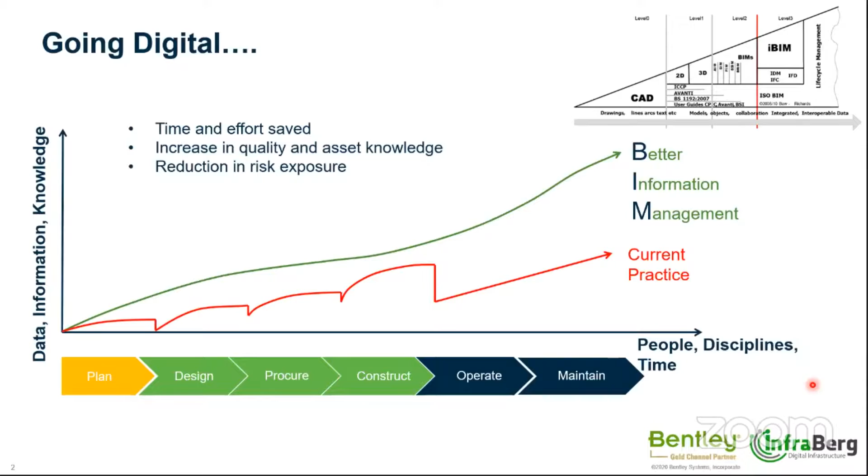This is how we try to design OpenRoads to meet these digital workflows. So if we look at this simple picture, usually in the past it started from CAD. Then we talked about BIM, and as we said, Bentley and Bentley solutions are going a little bit further. We call it digital twin, and a lot of companies use this term for developing their software in that direction.

So what is a digital twin? Simply, a digital twin is a digital representation of your project. And it is really challenging to create workflows, standards, etc., for closing the loop at each stage of the project, like planning, design, construction, and operation, and keep your digital representation of the project up to date. It means that at every stage, when you look at your model and project, it should look the same as the real assets. It's really challenging, but every aspect of OpenRoads, OpenRail, and OpenSite development is done having this idea in mind, as I hope you will see during my presentation.

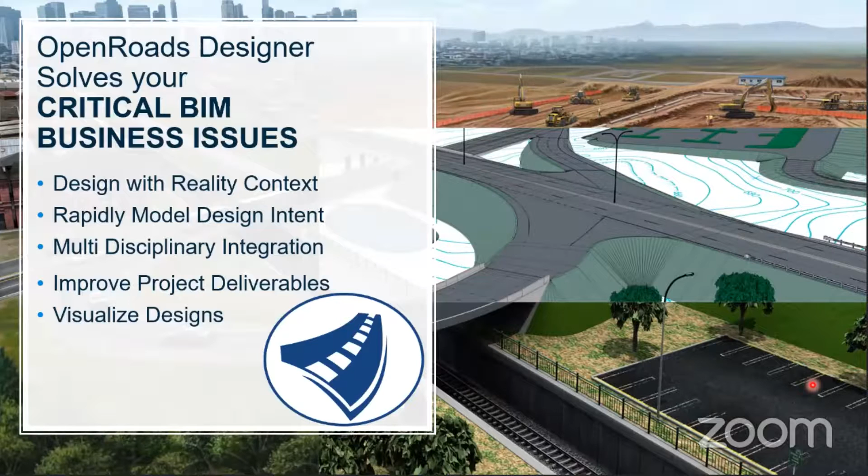And of course, there is a business aspect, meaning that what we do is to solve your business issue. So let's start with the first one. There is design with reality context, and what is important here, one aspect is that big data is impacting each design lifecycle process.

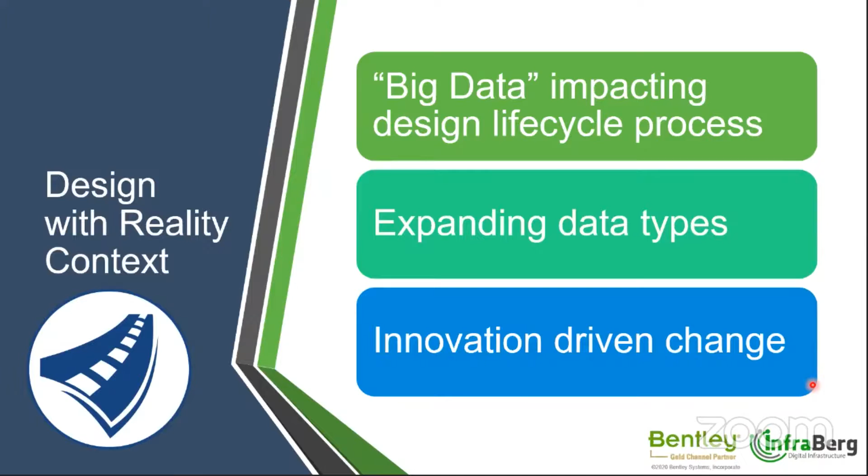Why? Because as you know, in order to do any infrastructure project, you need to take information about the terrain, and usually it demands a lot of data. And OpenRoads is very flexible for handling different types of data about terrain. And we are still expanding to different data types which are the standard on the market. And let's have a look at the example.

So as I told, the terrain is the basic information which the design process starts from, and OpenRoads Designer, OpenRail Designer, and OpenSite Designer are able to handle different types of data, like point clouds. Starting from point clouds, you can attach point cloud data to OpenRoads Designer without any additional application. It's a built-in functionality. You can attach a reality mesh, which Gerard talked about.

If this is created in ContextCapture, it's very easy. You just attach it as a reference file without any conversion. You can even attach it from the cloud if you keep it in the cloud, so there is no need to download it to your disk. As information about the terrain, you can attach any rasters. For example, orthophoto maps.

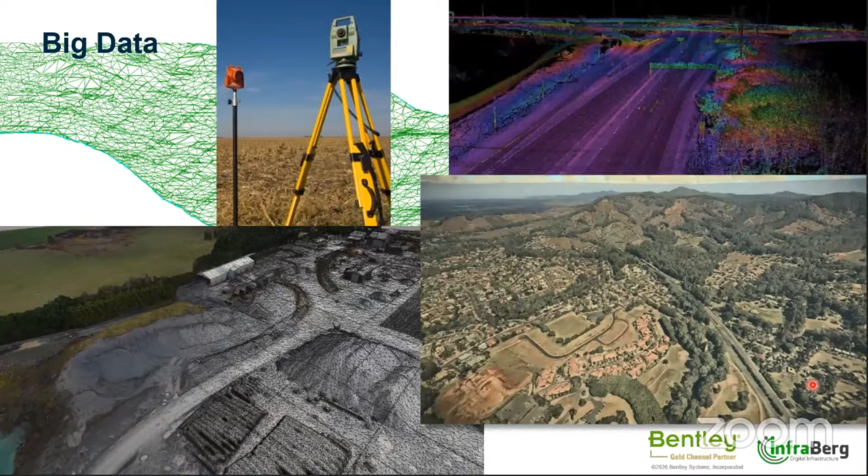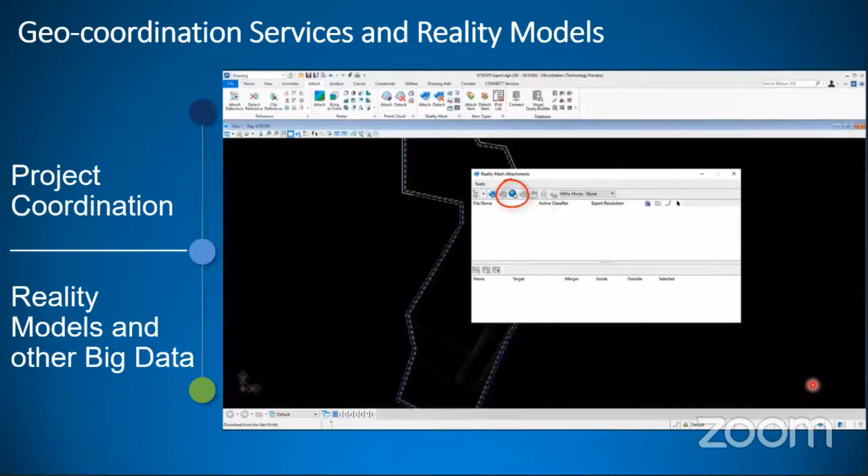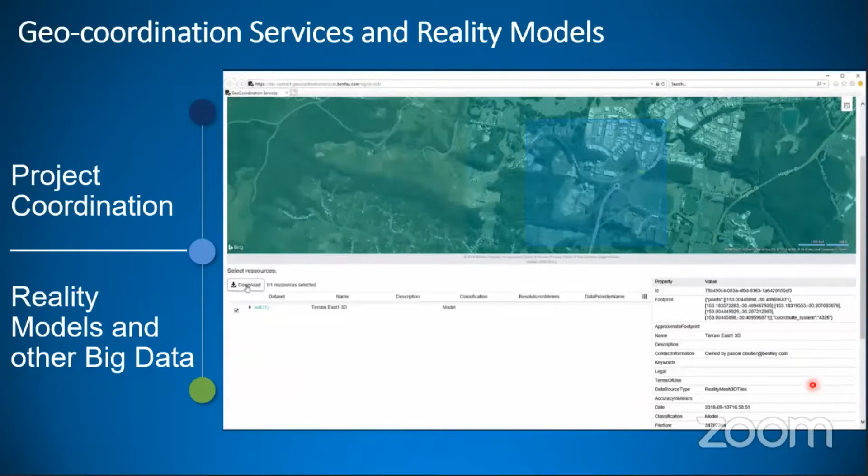And moreover, as you can see here, there is even functionality which allows you to attach data; of course, all the data are geo-coordinated. Here is an example from the geocoordination service where you can download reality models directly to OpenRoads from this service. Of course, it depends on data availability around the world. I'm sure there are no reality models in every part of the world, but when one is available, you can download it from this service directly to OpenRoads Designer.

Also, services like Bing Maps can be utilized in OpenRoads Designer simply as part of the view. You can just switch it on or off as a background, depending on your needs. So it's very convenient to have a broad context of your project in OpenRoads Designer.

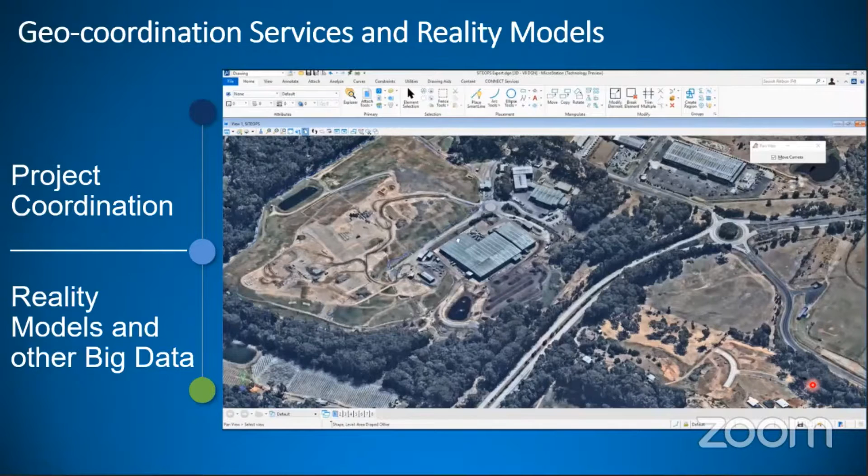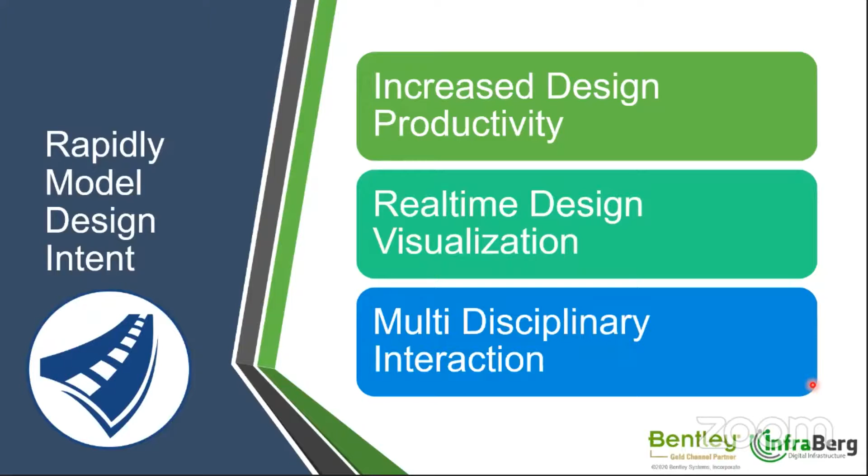So the next point is model design intent. So here let's have a look. In general, when we have the digital terrain model, the next topic is creating the geometry, right? In OpenRoads Designer and OpenRail Designer, geometry is parametric. It means that everything you create in OpenRoads is parametric.

What is the value of such an approach? The value is simple, because every project is iterated. Almost every project is changing every day. So when you have parametric geometry or other components, adopting this change is easy, because you just change the parameter and your geometry is adapted to the new conditions. So this is dynamic, interactive, and moreover rule-based.

What does it mean? It means when you, for example, create the centerline of one road and another road will be perpendicular to the first road, and it's your intent, the software remembers this intent, and when you edit this geometry, the software keeps this constraint. So when you move, for example, the perpendicular alignment along the first centerline, it stays perpendicular.

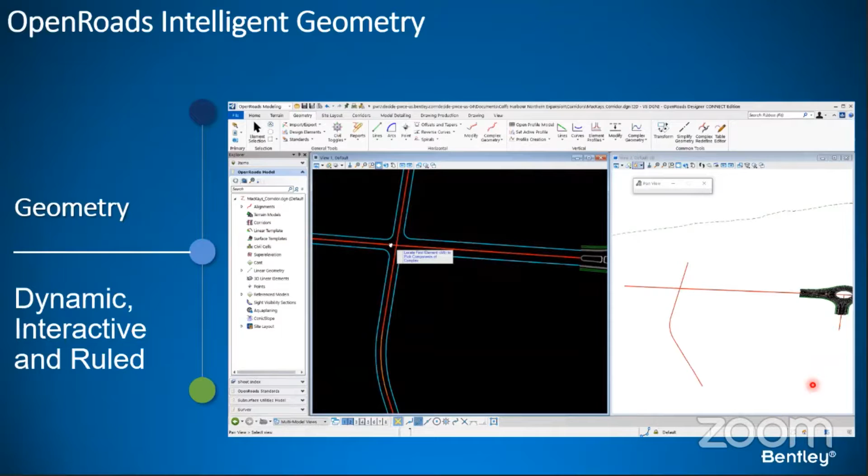And by the way, you can see here in this presentation that displaying your project results is on the fly. So if you create, for example, a 3D roundabout like here on the right screen, it's simply displayed, and there is no need for special generation or opening a special view, just opening the 3D view. And if you have assigned materials to your components, it is even displayed in a realistic way.

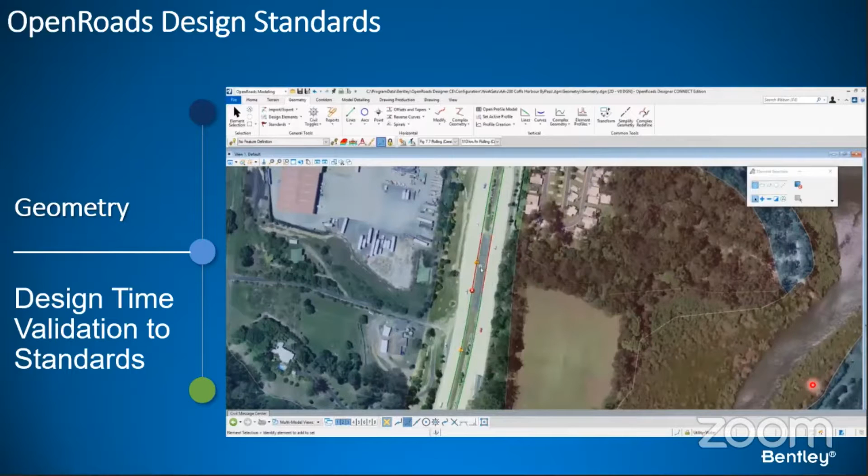So in the engineering world, the next topic: we know that standards are very important, right? And moreover, projects are complicated, and checking all standards for all geometries and all elements of your project manually is very hard to do. So the software has tools for automatically checking your chosen standards, and there is a message center which gives you information if something is wrong.

For example, if the arc of your alignment does not meet your minimum requirements, this is reported, and then you can act, changing it or leaving it on purpose, etc. So shortly, the design standards are under control, and the software is taking care of it.

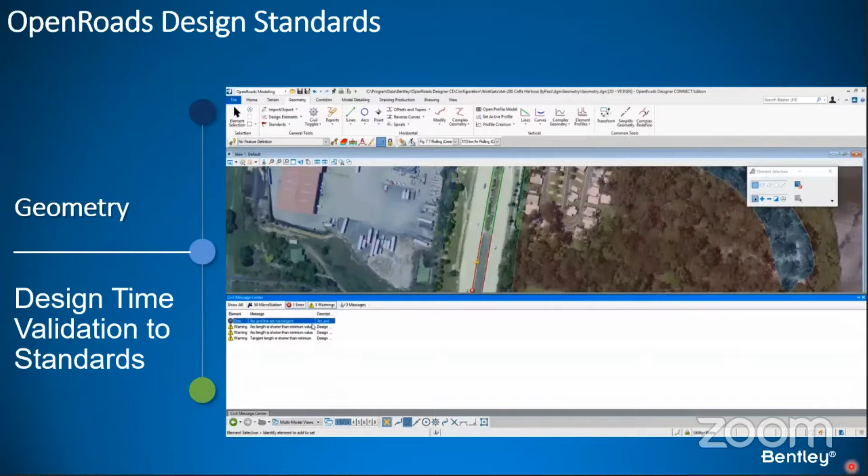And you see here there is a corridor, because when you have the digital 3D model, you have created the geometry, I mean the horizontal geometry and vertical geometry. Then the next step is creating the corridor. All is intelligent. What does intelligent mean? Intelligent means parametric.

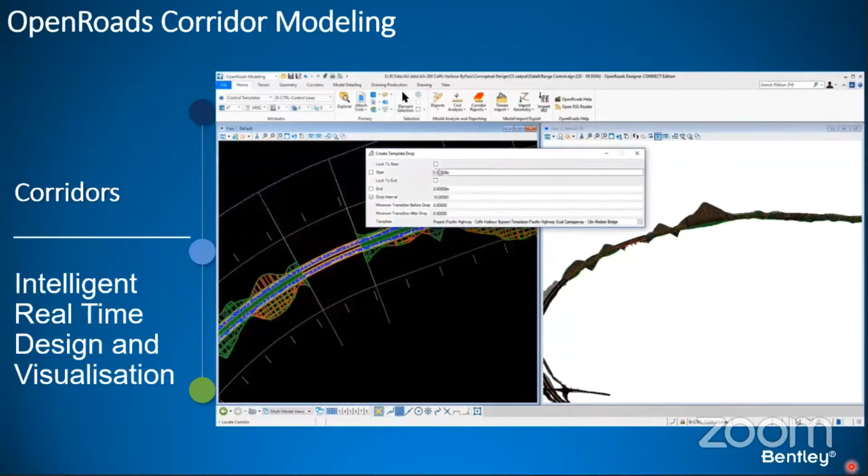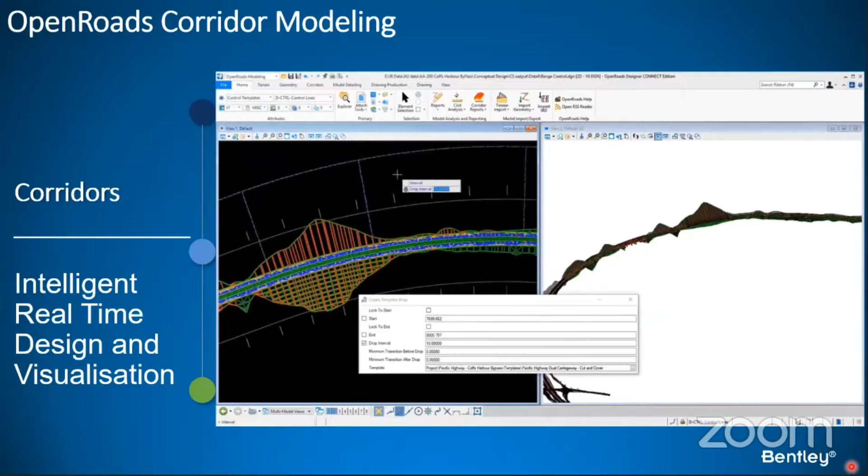It's in real-time design. So when you assign, like here, you see the template, automatically the software is creating your corridor in 3D. So almost in real time, you see the feedback of your project in 3D. And as I mentioned, when you have defined materials to your components, you see those materials in 3D view. For example, if asphalt is assigned to the pavement component in the template, you see in 3D view your pavement with asphalt.

And here you can see that everything is dynamic. So it means that when you want to edit, for example, the station of your bridge, you can just drag the beginning of, in this case, I believe it's the end of the bridge, and everything is recalculated in real time, and you are getting your model up to date.

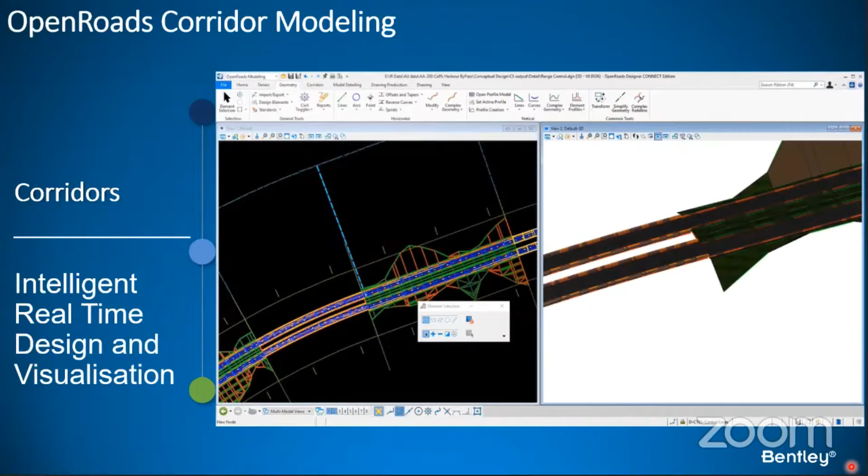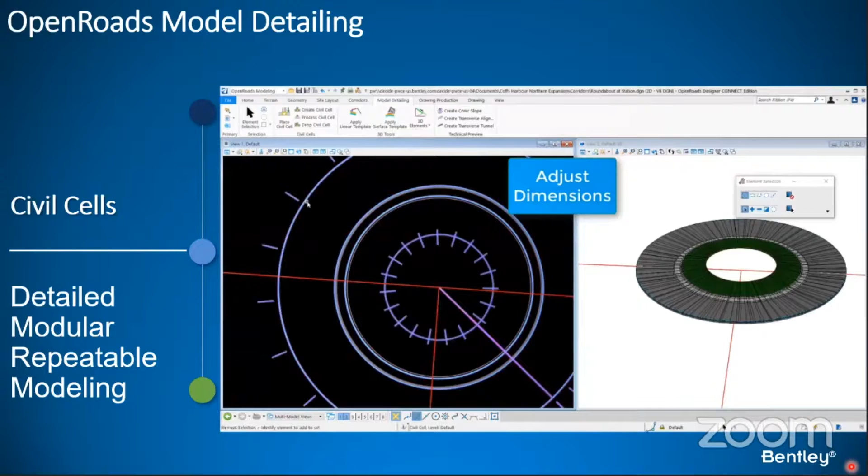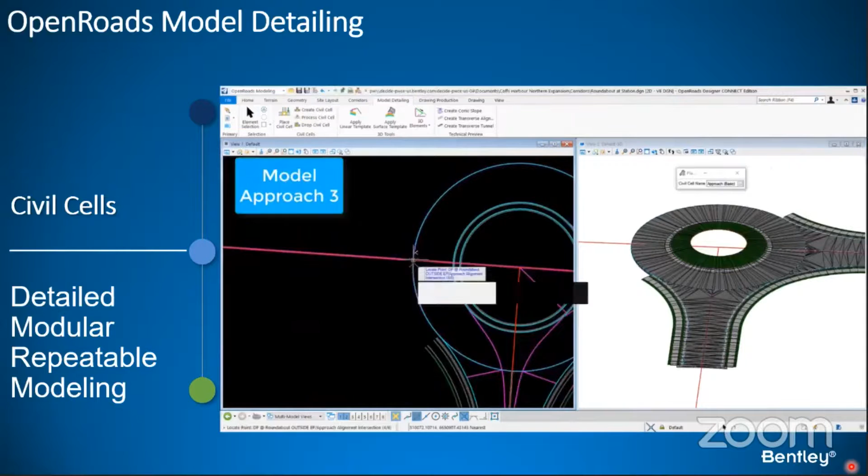So, the next thing is the so-called civil cells in OpenRoads Designer. There is a lot of engineering work with repeatable modeling of typical elements like, for example, intersections. In this case, this example is showing a roundabout. Each time you want to design, for example, a roundabout, there is a lot of work, because such elements have complicated geometry. So why do it each time? It's better to use so-called civil cells.

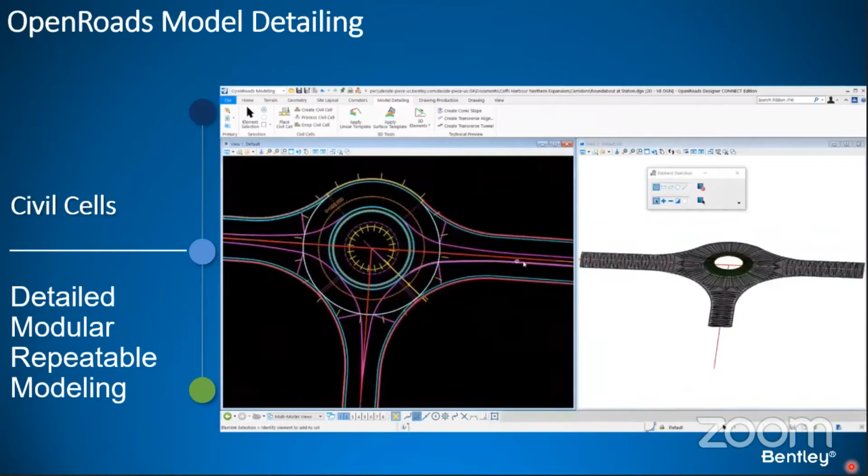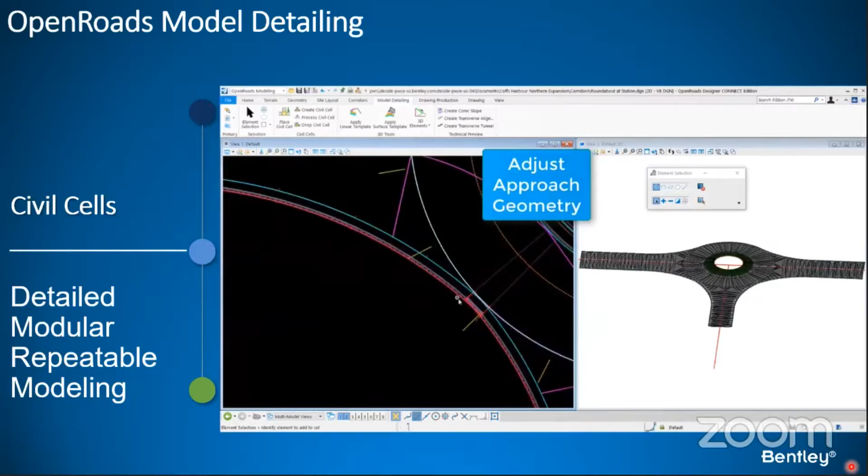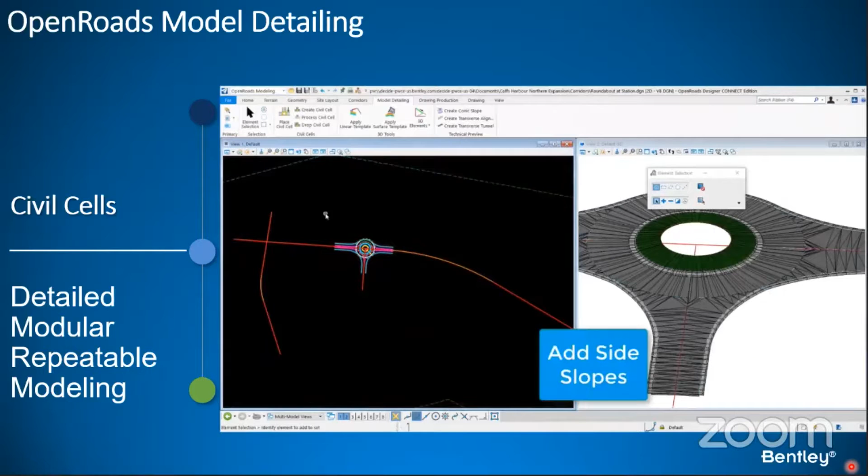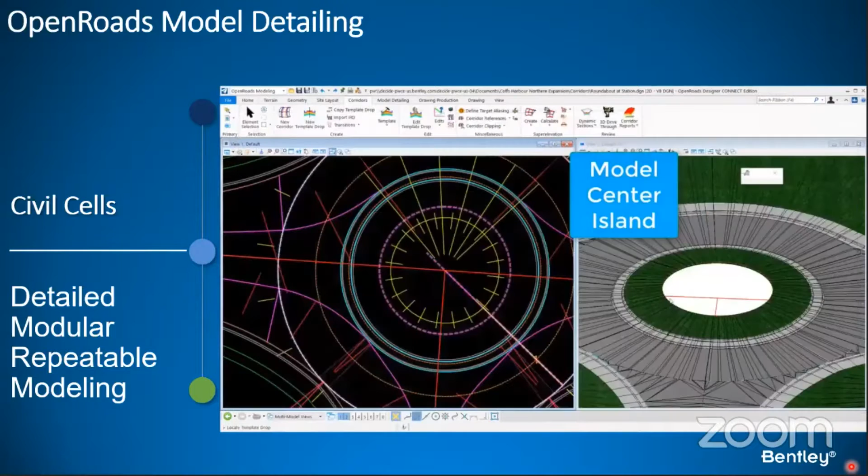It's just geometry saved to the library for reuse. So it means when you create, like in this example, the 3D roundabout cell, you can upload it to your civil cell library and reuse it for the next roundabout. It can be as simple as 2D geometry, but it can also be a 3D element.

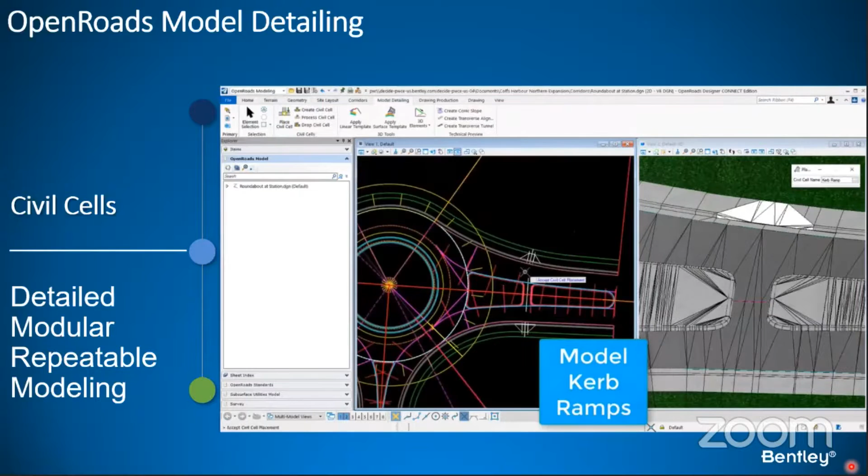Moreover, when you put this civil cell into your project as a second, third roundabout, etc., after inserting it you can edit it because it's still parametric. So if you want to adapt this civil cell a little bit to the new location, you can simply click, for example, on the geometry of the curve and change your radius from 10 meters to 15, etc. So this is a very powerful tool and saves your time for repeatable designing and modeling.

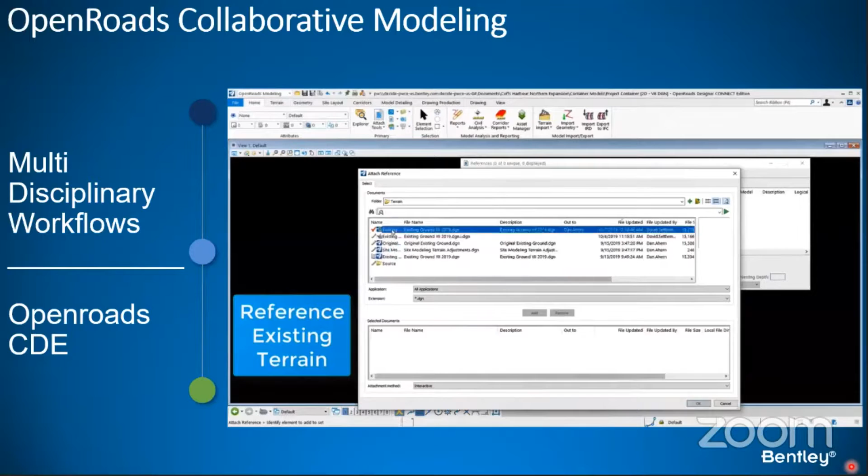Okay, and the next topic, which we believe is very important, is multidisciplinary integration. There is no infrastructure project consisting of only one discipline, right? Everybody, I believe, agrees with me. And one of the biggest challenges is to coordinate several disciplines together, especially when each discipline is using different software, there are no standards, etc. We believe that OpenRoads addresses this point quite well, I mean, multidisciplinary workflows.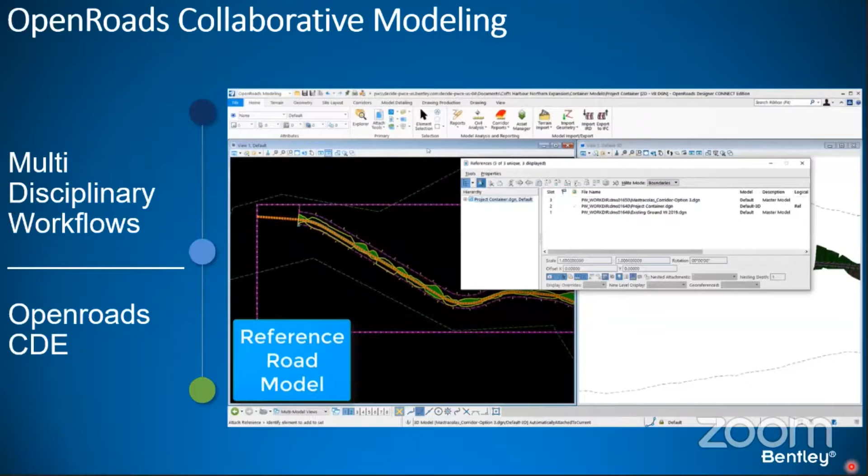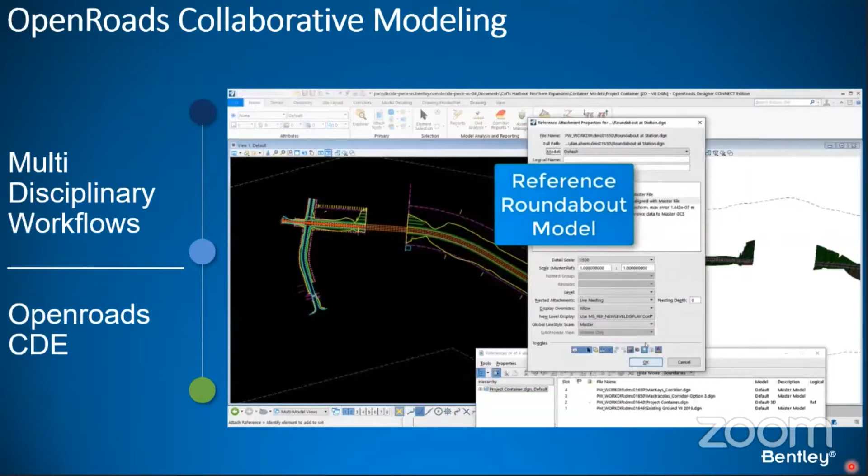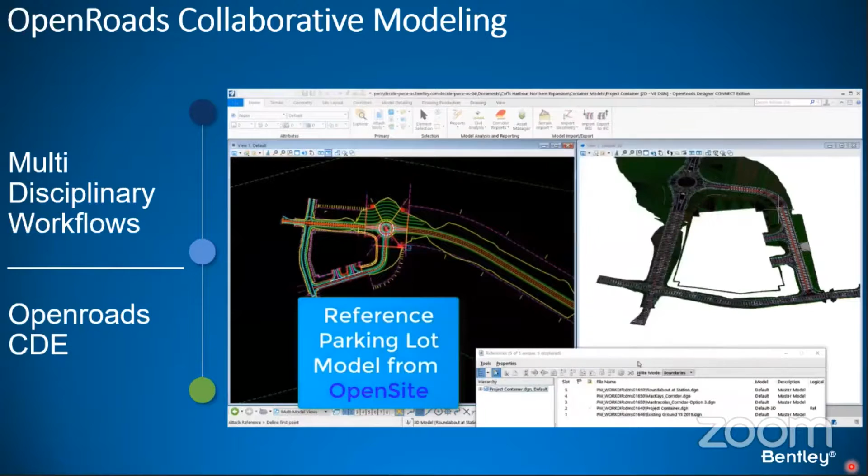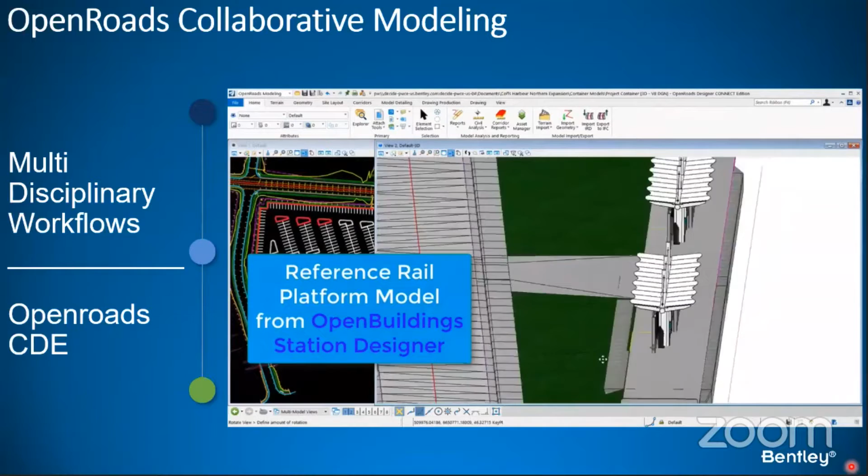As you can see here, there are models already finished, like the road corridor and roundabout model. They are attached to one file as reference files. Another model is a parking lot from OpenSite, designed in OpenSite Designer. There is an OpenBuildings Station Designer model. This is a Bentley application dedicated to designing stations, rail stations. And we will also attach from OpenRail the rail corridor, with the rails and full model. You can see it on the right.

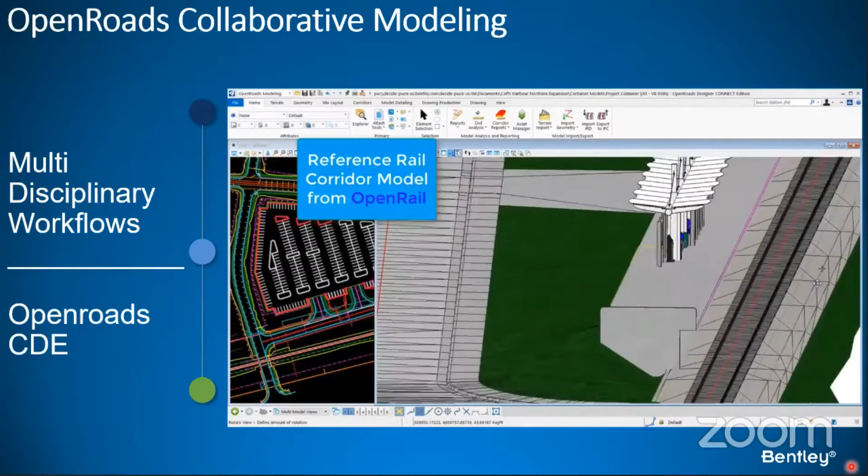And such a multidisciplinary model can be published, and drawings can be created. This is quite easy. I believe it's worth mentioning here that Bentley has plugins available for third-party software like Civil 3D, Revit, and others for publishing projects, for example, from Civil 3D to a Bentley iModel.

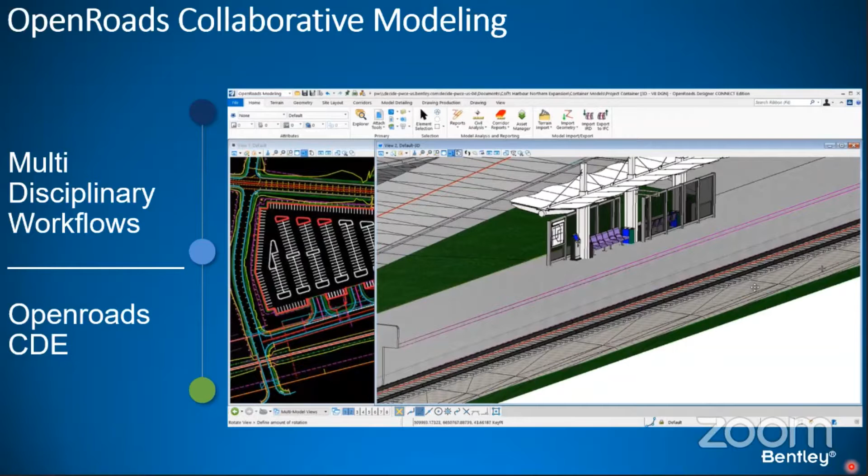So it means that, for example, if part of your project or one of the disciplines is created in third-party software other than Bentley, you can publish it to the format which Bentley software consumes and attach it to your project. So this is very powerful.

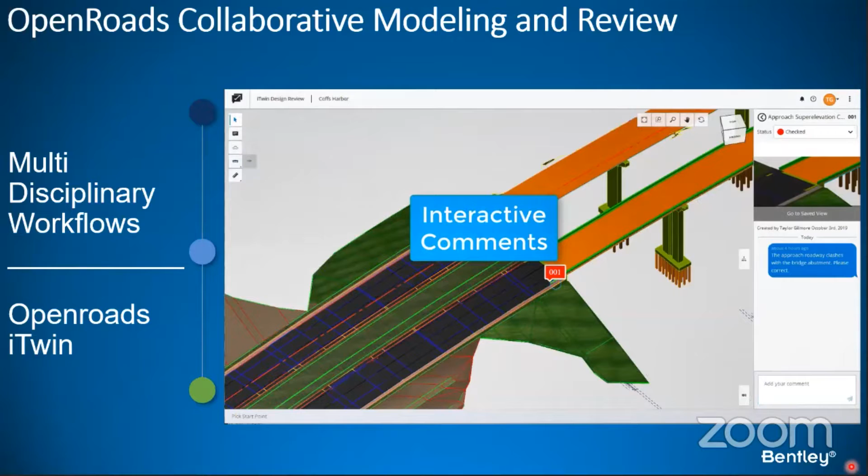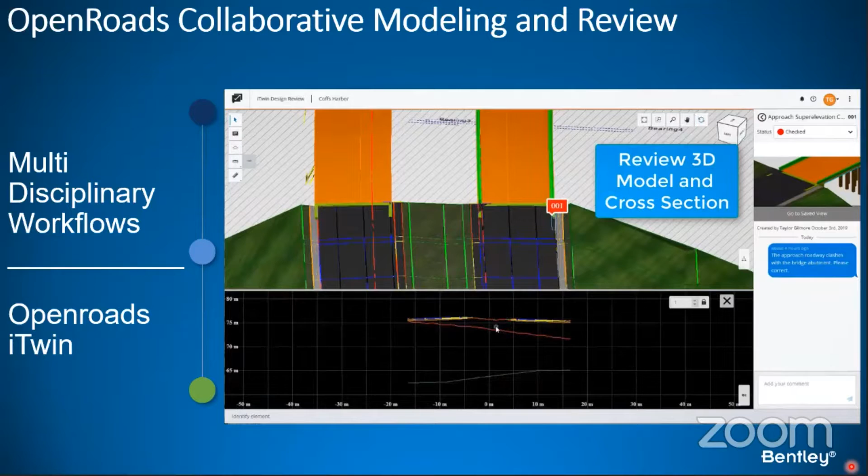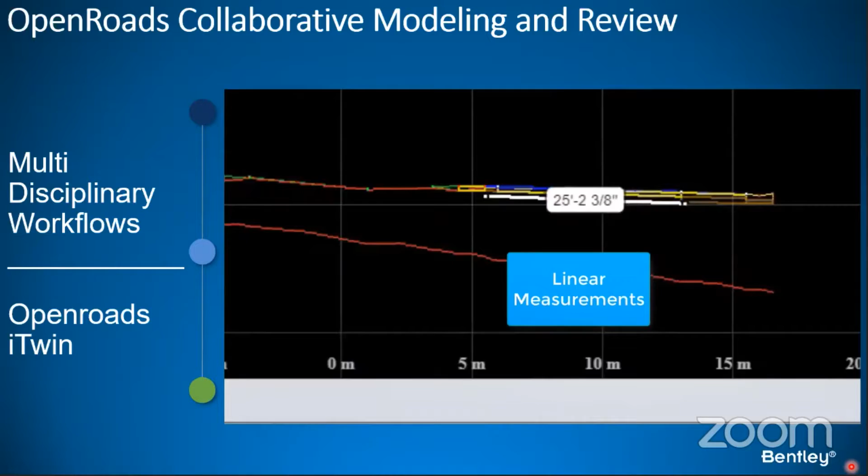And let's see how such a multidisciplinary project can be reviewed, because it's also a challenge to publish such data. What you can see here is the so-called OpenRoads iTwin. It means that when we have created such a multidisciplinary project in OpenRoads, you can publish the whole model using iTwin Synchronizer, a free tool from Bentley, to the cloud and to the web format. Here you see a web application where you can review your project.

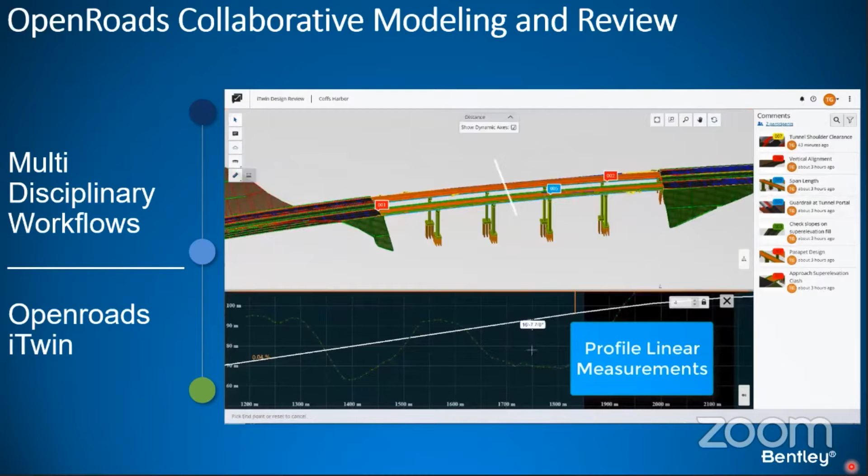You can create the profile, you can create the cross section, you can put comments. They look like messages in iPhone, something like this. So very familiar for most of the people, and usually reviewers are not very familiar with the origin application. So this web application is very simple, just for reviewing the data, displaying the data, and putting all the comments.

And moreover, there is a functionality for comparing. First of all, I should say that this application is keeping your model always up to date. So it's giving you the information if the model you open is the newest one, and if it is confirmed, you are receiving the information that you have the latest version of your model, which is very important during the review process.

And then you can even compare your latest version of the model to the previous one, and the software is showing you what has changed, what was removed, and what was added. So this is very powerful and really addressing the digital twin workflows.

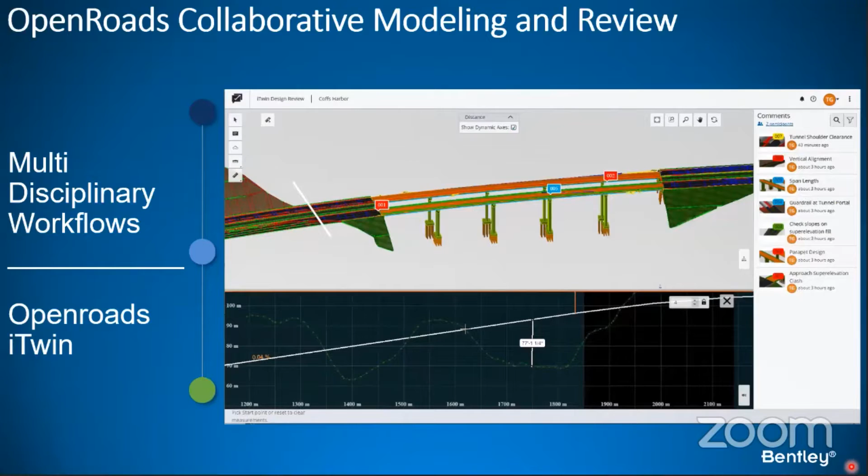And when you create your project, when you review your project, at the end of the day, you need to deliver your project to the client, to other people you cooperate with. So another important business issue is project deliverables. So OpenRoads Designer, OpenRail, OpenSite, the same family of products, have traditional tools for 2D plans and reports.

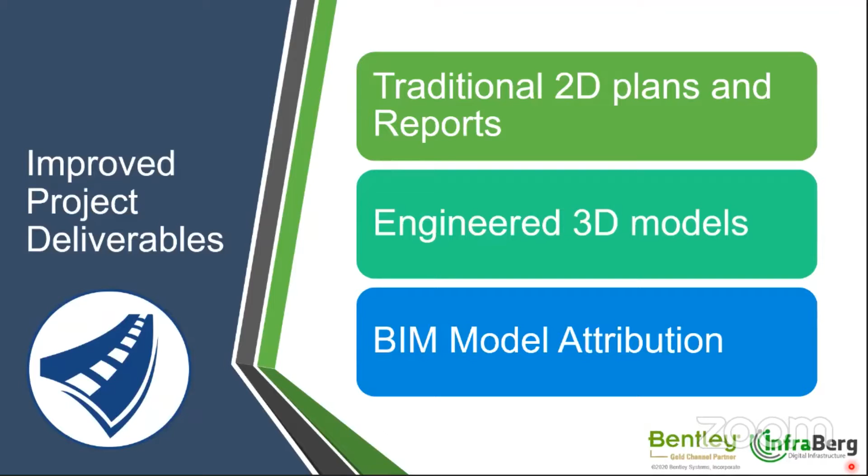You, of course, are creating engineered 3D models. What does engineered mean? Engineered has several aspects. It means they are very accurate and parametric, and another very important point, especially in BIM workflows and digital twin workflows, is model attribution. So let's see what you can achieve in OpenRoads Designer. First of all, in case of drawing production.

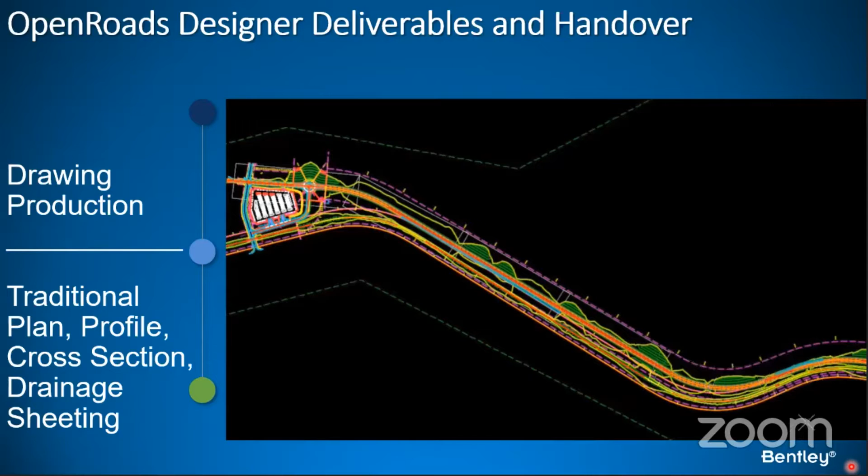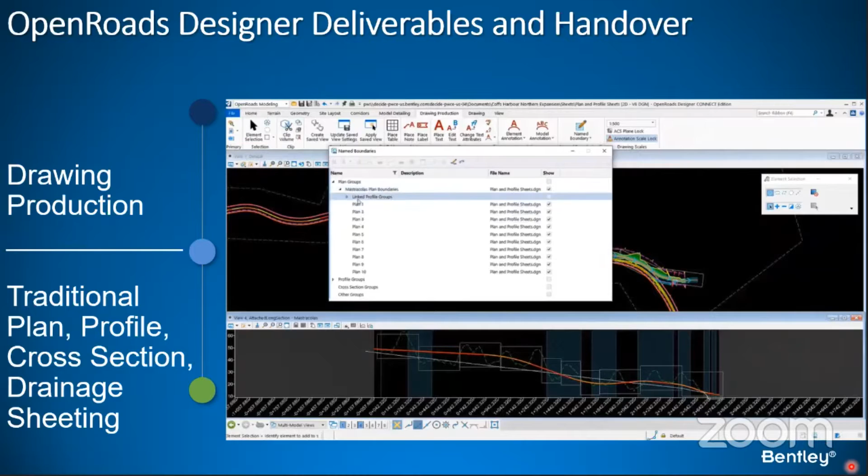So we use the same multidisciplinary project. When you simply place sheets in plan, you have full control of how long the sheets are, how big they are, how they change on the arc, because usually on the arc we need different sheets, and then you create sheets on the profile. You can see it's an automatic process, automatically changing the Z level of your frames in the sheets.

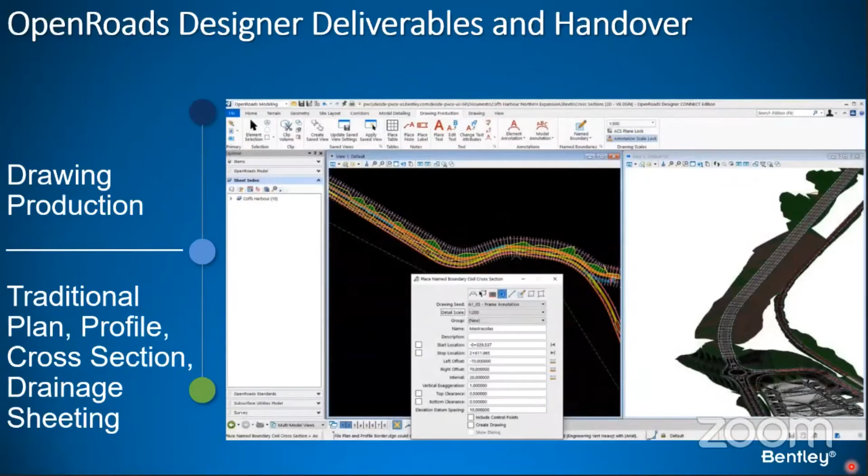And when you create the boundaries, the software is creating the sheets. And you can see all the sheets are indexed. It's very important because it's very easy to find, delete, remove, edit, etc. In this example, you see the sheet with plan view and profile view, but of course you can create them as independent sheets, profile view and plan view.

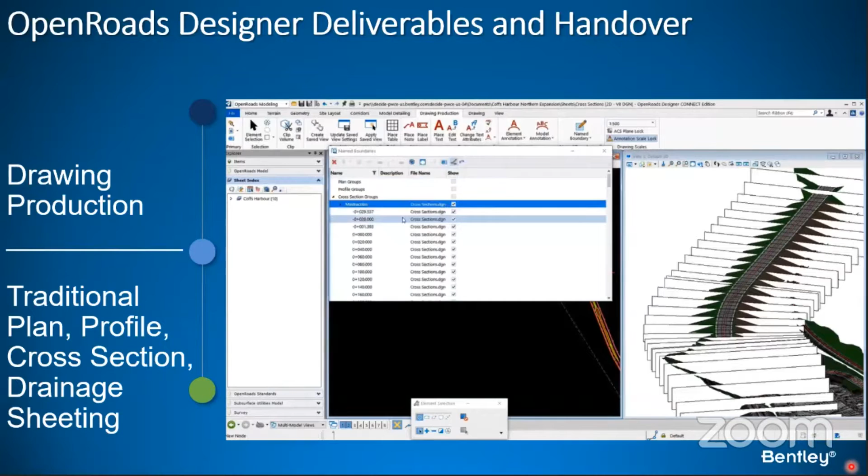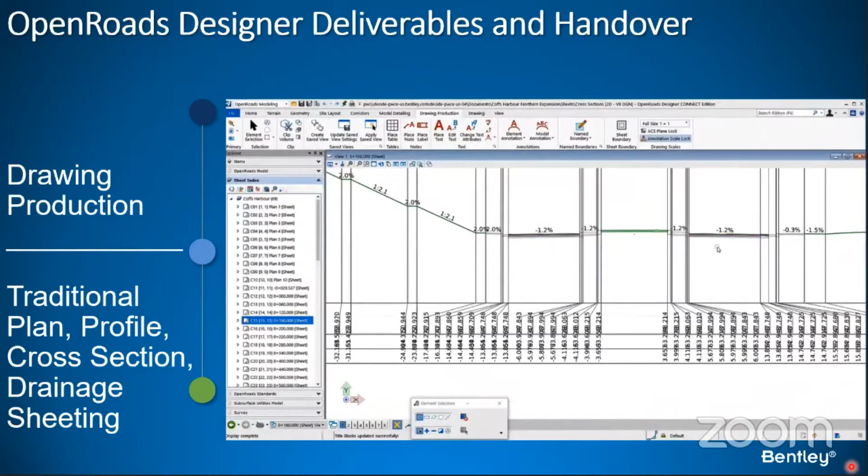And here you see the cross-section views, and we create the cross-section sheets. Of course, there are a lot of tools for annotating and managing them. You can annotate this data in the table below your cross-section. You can annotate it directly on the projects.

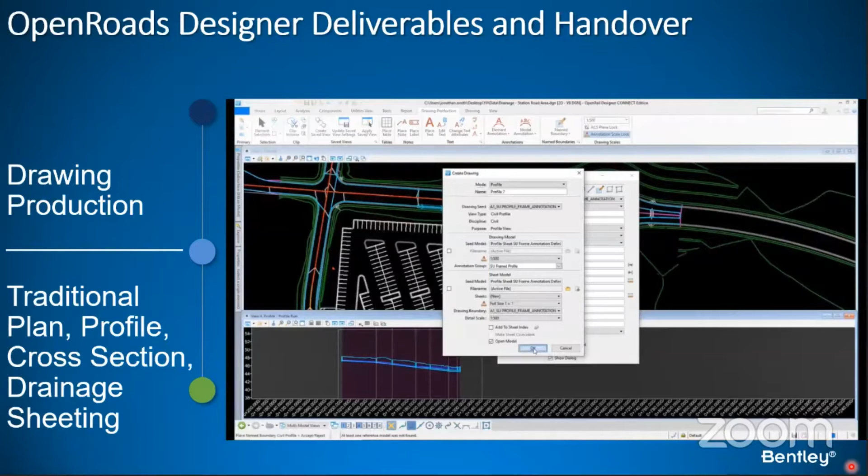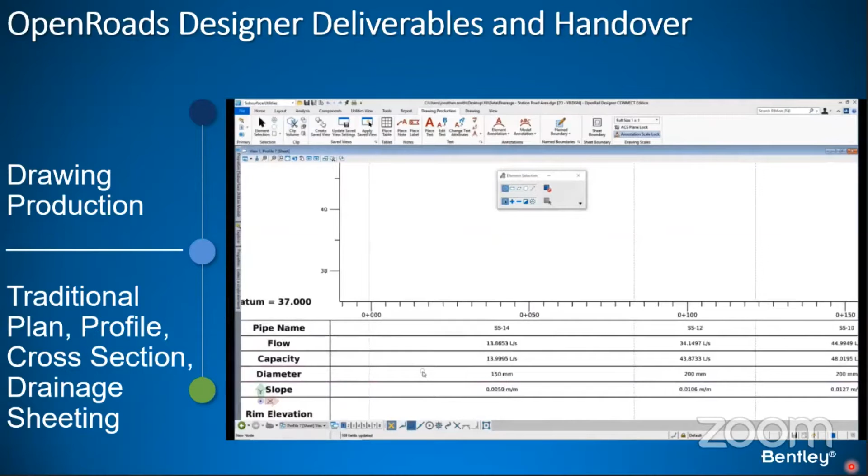But please note that if you have the 3D model of your multidisciplinary project, on the cross section everything is cut, right? And even if you attach the model from, for example, Revit, this part of the project will be cut and displayed on the cross section sheet. As was shown, we also support drainage profiles and drawings for drainage sheeting. So let's have a look also at some tools, just as an example for analytics.

One important aspect in road design and rail design is sight visibility. So there is a dedicated tool for checking the sight visibility. This is of course based on 3D models, so it's checking the visibility in 3D. Like you can see here, because of the barrier on the bridge, the visibility doesn't meet your defined requirements. So there is a problem here, and it is reported in red. You can display the area where the issue is.

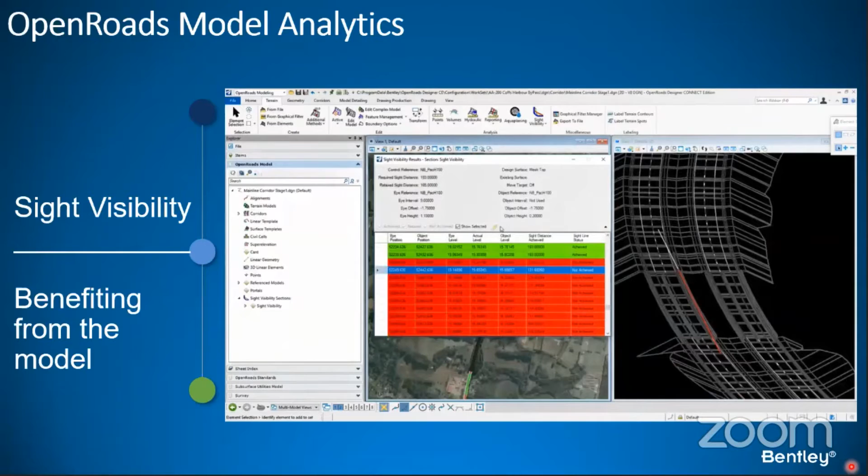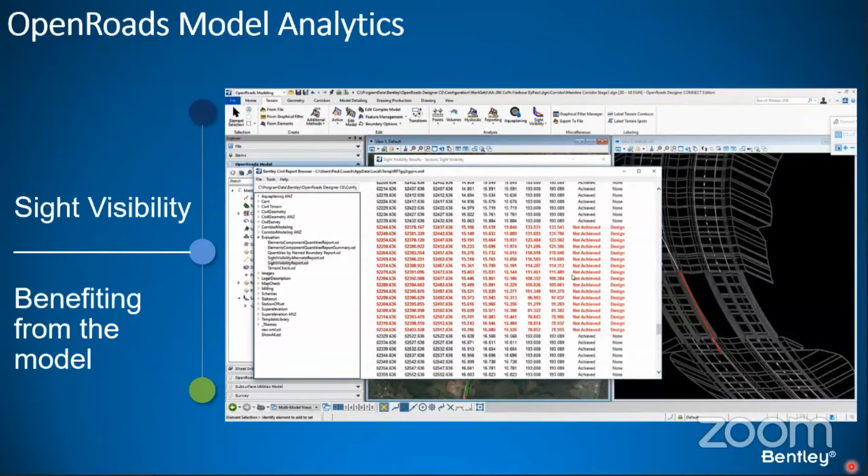You can report it. All the reports in OpenRoads Designer are based on XML files, so it's easy to adapt the displayed data to your needs. So this is very beneficial.

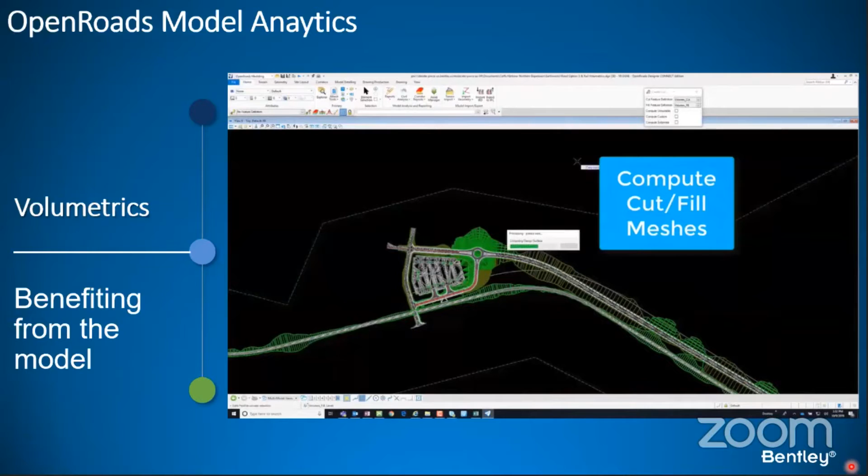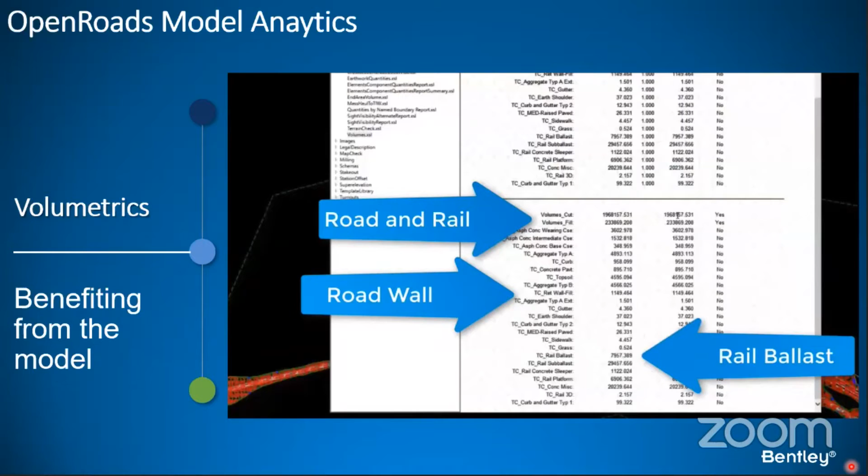And another important aspect, of course, is calculating the volumes. And there are two aspects of volumes. As we know, when we have a very precise 3D model, the more precise way of calculating volumes is volumetric methods, based on a 3D model and even a 3D multidisciplinary model. So in one report, you can have rail volumes, site volumes, and road volumes.

But still, around the world, a lot of investors demand the old way of calculating the volumes. It's called end area volumes based on cross sections. So just to tell you, this example was shown based on volumetric methods. It means based on the 3D model, but the software also supports old methods based on cross sections. It's called the end area volume method.

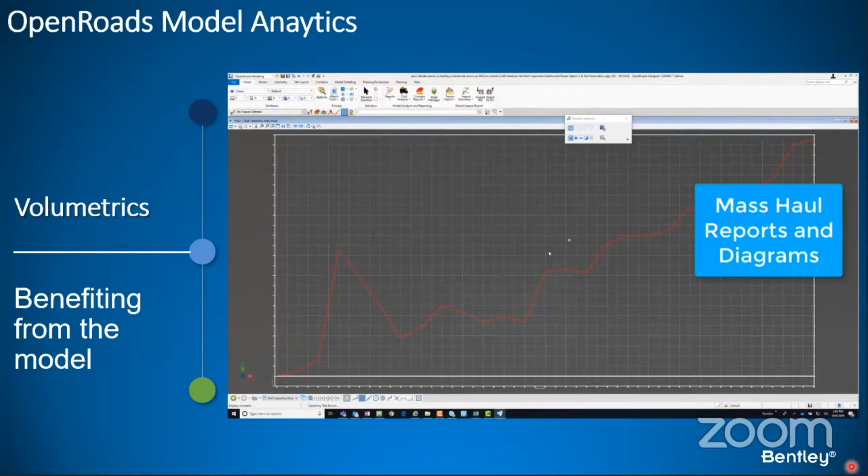And at the end, it was shown how to create a mass haul report and diagrams for better planning of your construction.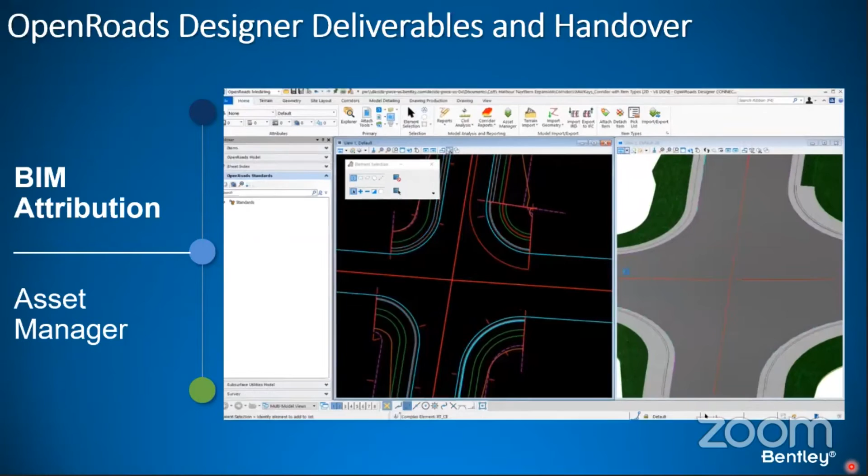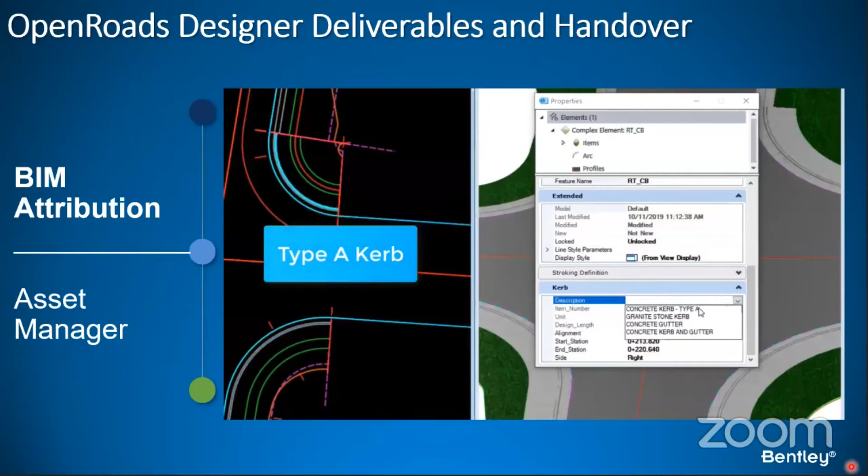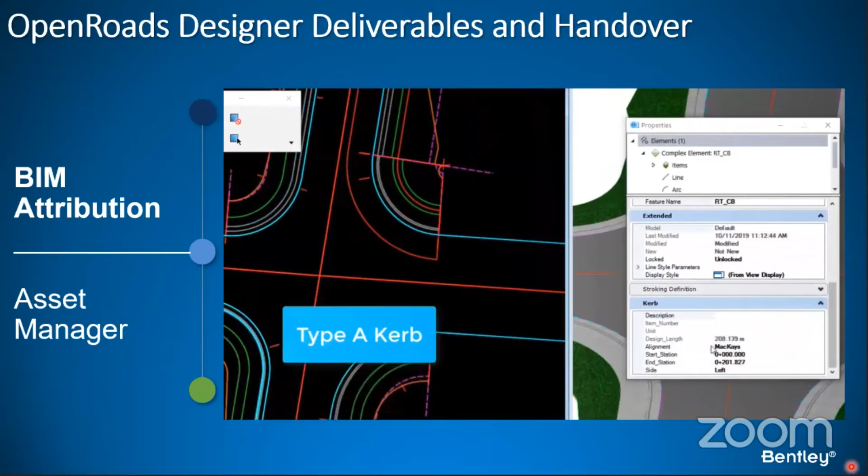I told you that one of the aspects, especially in case of BIM requirements, is BIM attribution. So there is a special tool in OpenRoads Designer called Asset Manager, where you can define a set of attributes and attach them to any component, any element, to build better information about your project, or usually to meet the standards of the investor, which requires you to describe your project in a special way with special attributes. So there are no limits for creating custom attributes and attaching them to the project.

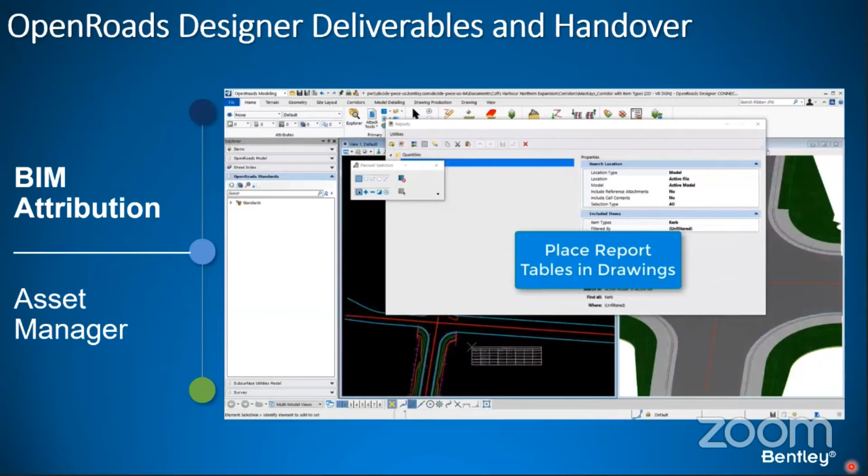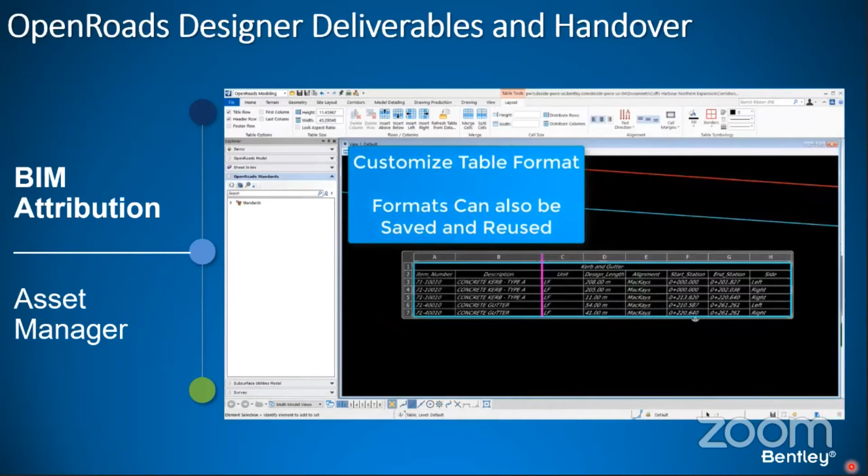And of course, when you have such attributes, you can create reports. And in fact, you are getting the quantities very quickly. And the reports can be exported to an Excel file. There are a lot of different ways, but here you can see the table put directly into the software, into the DGN file, and in fact it is edited like in Excel.

So you see in this example different types of kerb, right, and the design length of each reported kerb. So that's also a very powerful tool for reporting the quantities, which is always part of the projects.

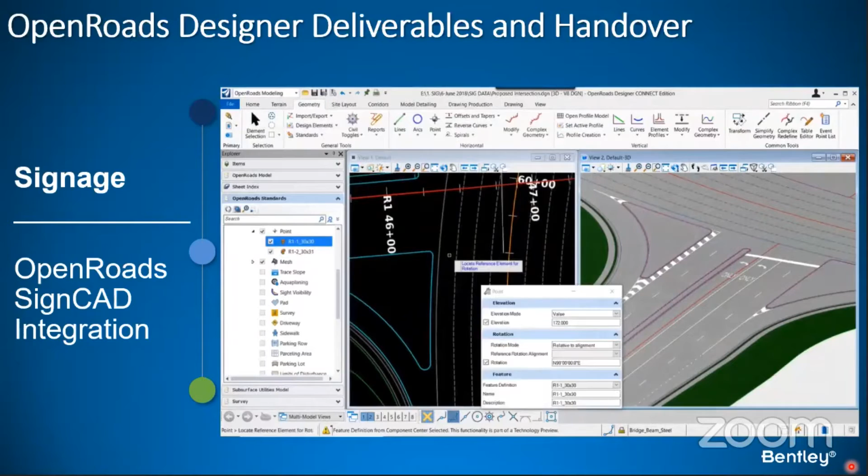And here you can see Bentley has recently acquired a company which has software called SignCAD, which is for creating the signs in your projects, and it has already been integrated with OpenRoads. It means that directly from the software, there is functionality which allows you to create and put the signs directly into your projects.

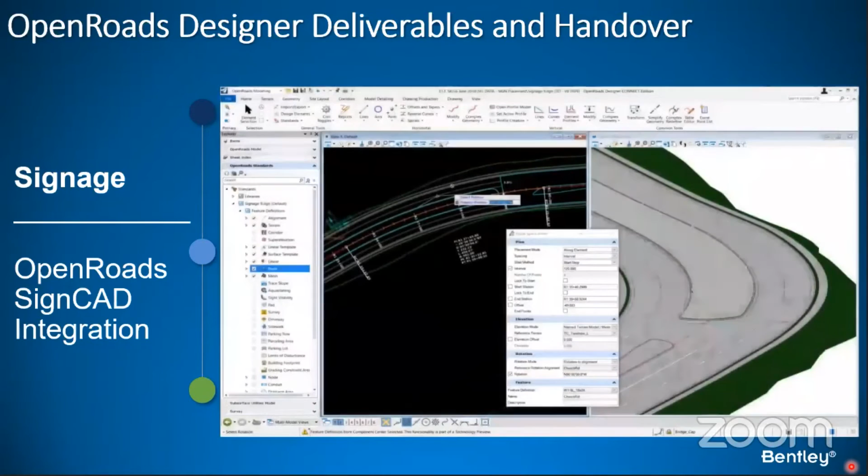But as far as I know, at the moment the standards of the signs and all those needed lines, etc., are limited to the US market. But we can expect it will be expanded to different countries. But as you can see, it's very easy to create the 3D representation of the signs in your project, and in real time you have visual feedback.

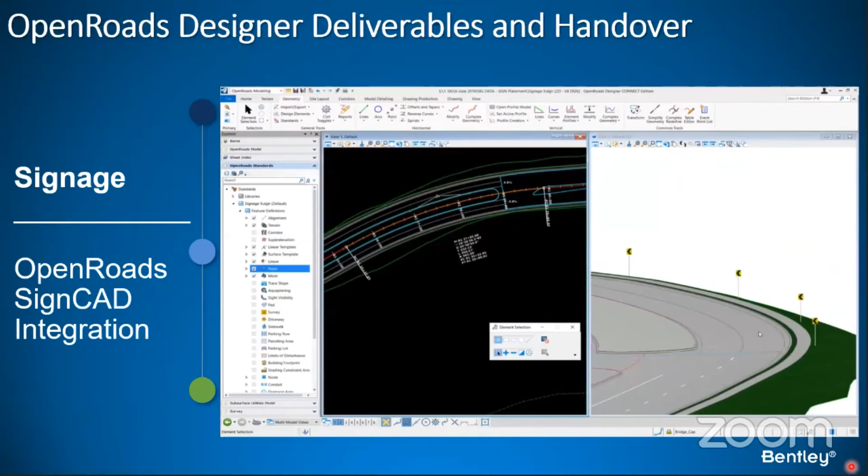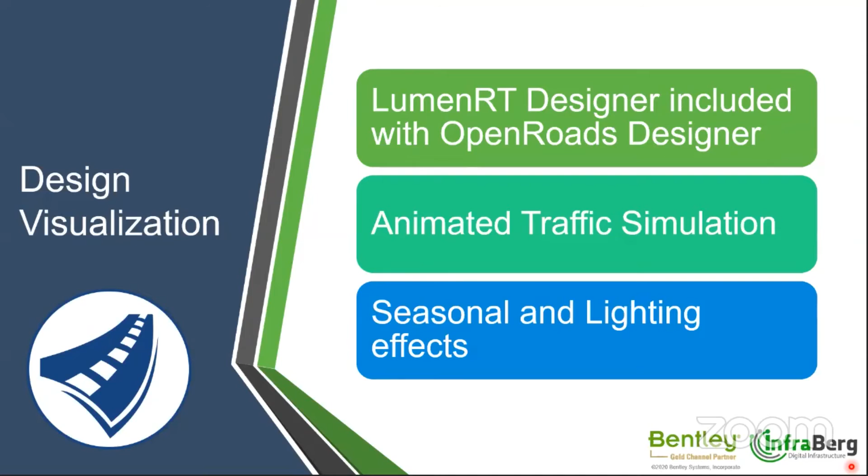And another part of your project is visualization. Usually you need to sell your project. So there is a built-in tool in OpenRoads Designer for visualization. It's called LumenRT, because it was another software which Bentley acquired a few years ago and integrated with OpenRoads.

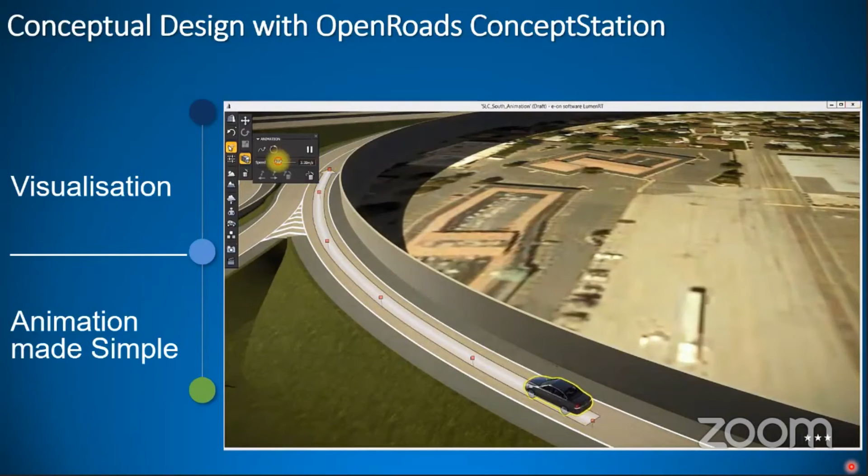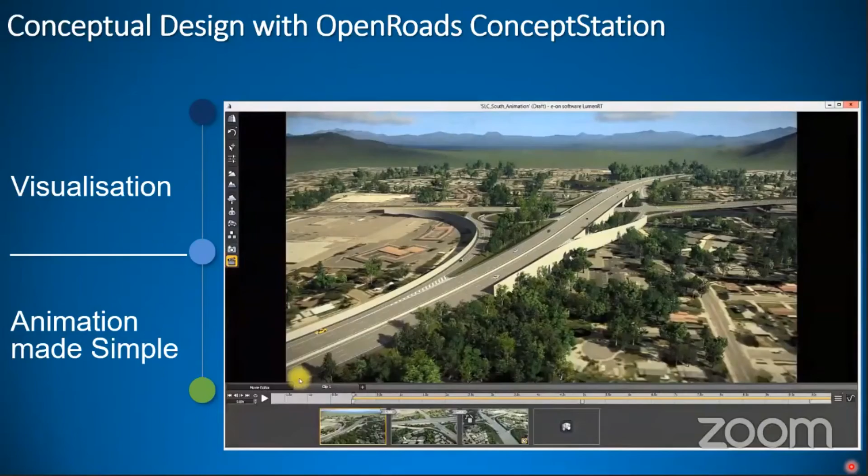As you can see here, our multidisciplinary project has been exported to LumenRT format, right? And it's very easy and handy software. As you can see, it's very easy to add traffic, trees like here, and create animations or very high quality pictures. It supports 4K, so you can really quite easily create, animate and visualize your project. Believe me or not, it's very easy and powerful software.

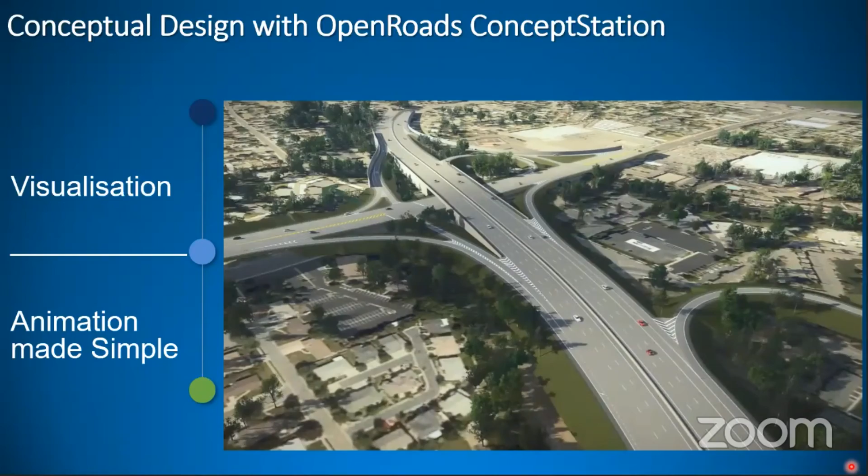Here is a full animation created with this tool.

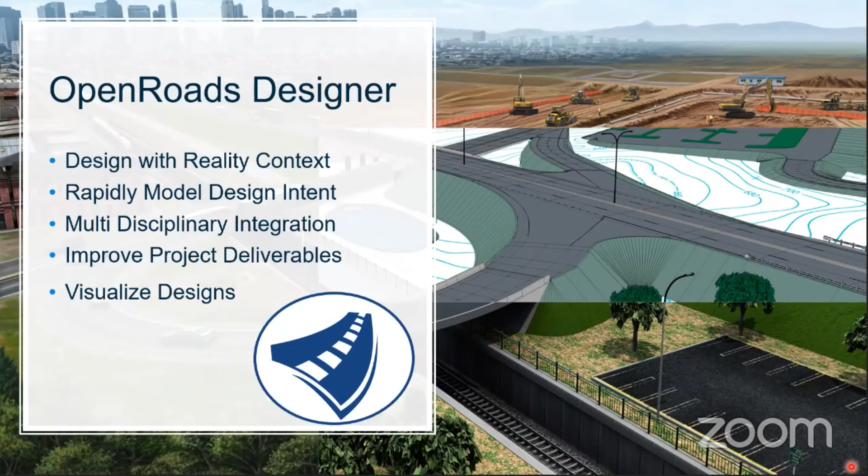So, in summary, I hope I have convinced you that OpenRoads Designer is able to solve your critical business issues thanks to functionality which allows you to design within reality context, rapidly model with design intent, integrate multidisciplinary projects, improve project deliverables, and finally visualize your designs. And I'm sure that if you implement OpenRoads in your workflows, it will help you at every stage of your project.